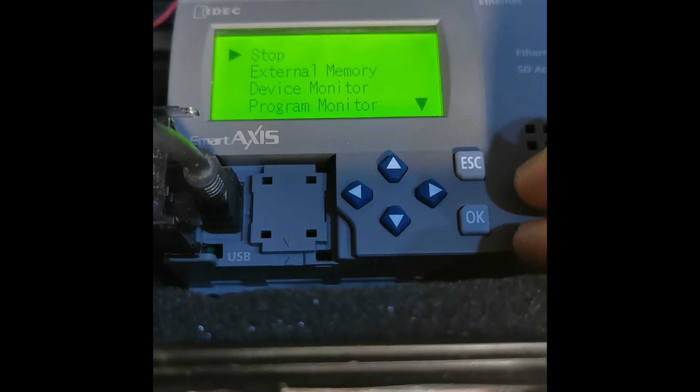It will bring you to a few options to control your PLC. Let us go through them one by one. First of all, by using this LCD display, you can either run or stop the PLC. Or, for those that come with an external memory card slot, you can stop accessing the SD card and so on. So those are some of the basic functions that you can do.

And you can monitor the devices available in the PLC. You can see which input points have been turned on, which output points are being energized, which timer, counter, and also the value in the data registers. You can see the internal control relays as well, which of them have been turned on and so on.

You can also use this LCD display to monitor the ladder program. You can even see whether any of the contacts is turned on and do some basic monitoring.

You can also monitor the status of the PLC. You can see that right now the firmware installed in this PLC is 2.24 and the PLC is in the running stage. The current scanning time is 1 millisecond, maximum 5 milliseconds, minimum 1 millisecond. It also shows whether the program inside this PLC is protected or not; right now it is unprotected. For the FT1A Pro that comes with an Ethernet port, you can also see the IP address of the Ethernet port.

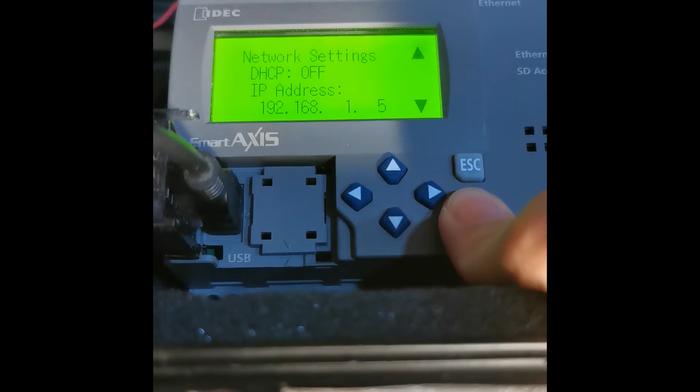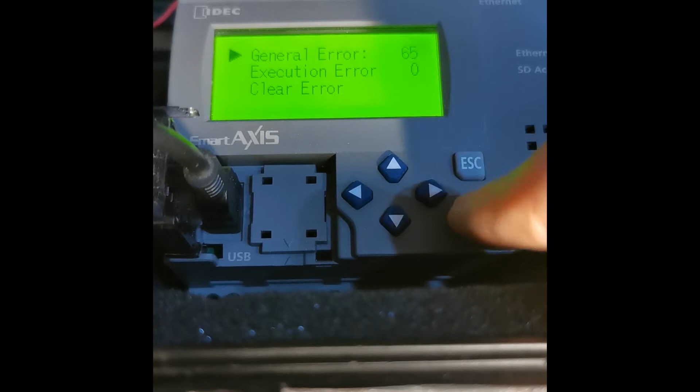Through this LCD, we can also check whether there is any error inside this PLC or smart relay. Other than these standard things, the user can also make use of this LCD display to create an interface that is more interactive or more relevant to the machine being controlled by this PLC or smart relay.

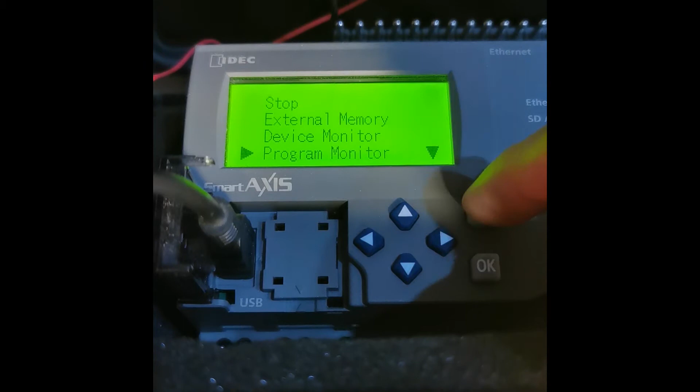Let me show you an example that I have loaded into this smart relay. I have created a few pages for when, for example, this smart relay is being used to control a coffee machine. I have integrated a bar graph here so that when this machine is serving coffee, I can show the progress from 0 to 100%.

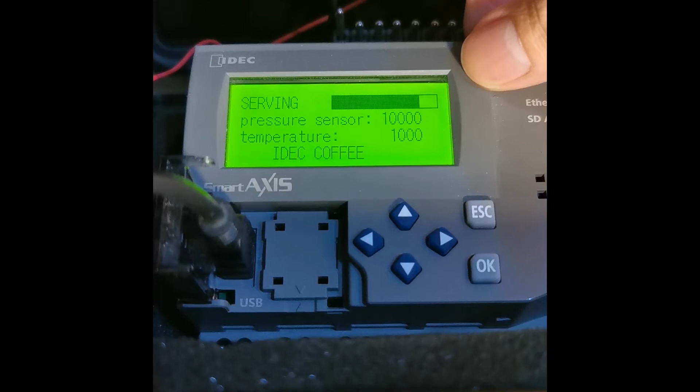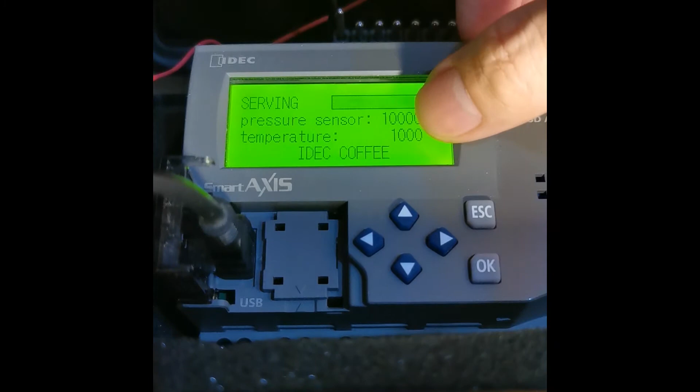Other than that, I can also put in PLC devices here for monitoring. I can see, for example, the pressure signal and the temperature signal from the sensor. I can even integrate these scrolling words.

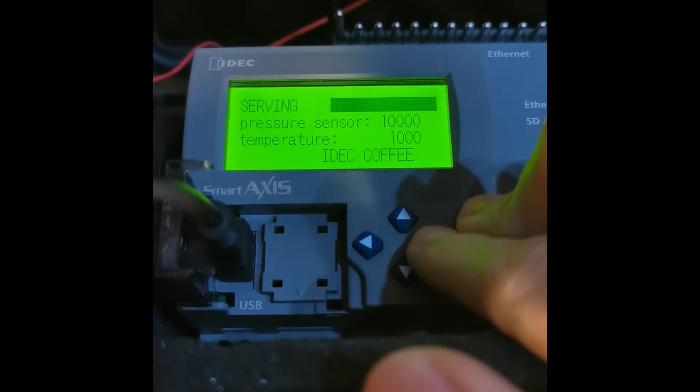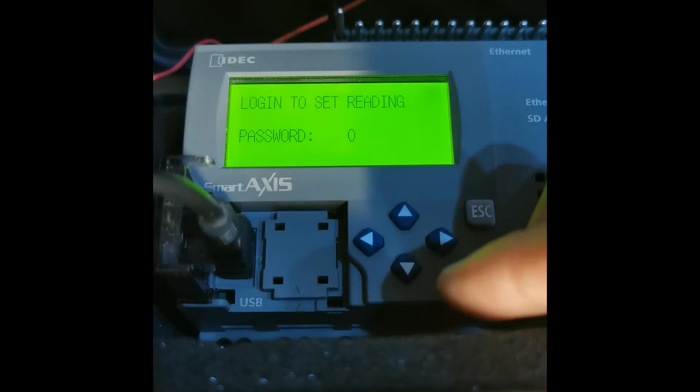And not only one page: I have created a second page to show the active alarms on this coffee machine, as well as a login page in case I have settings that can only be changed by an authorized person. Only those with the correct password can go into the settings page. So how do you key in the password? Again, it's by using these few keys.

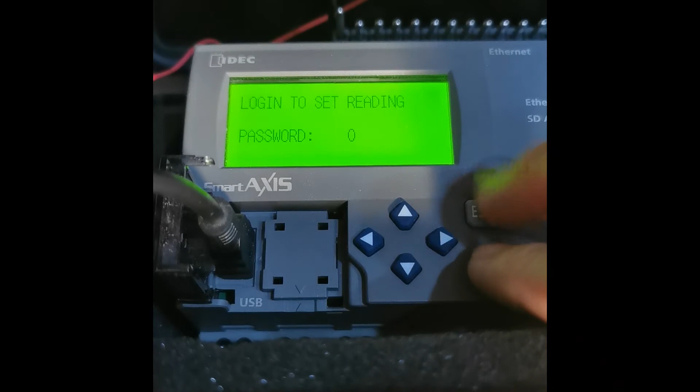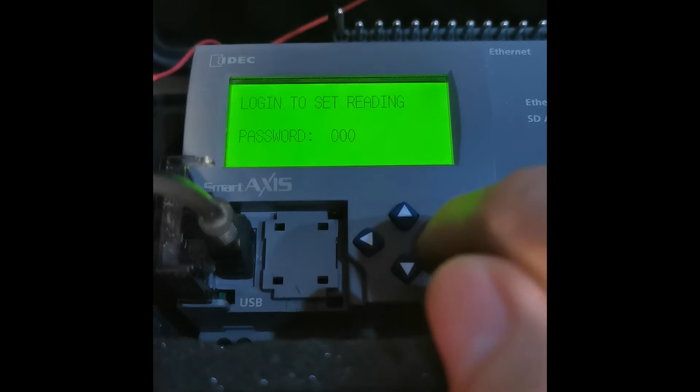So what you need to do is simply press this OK button for a few seconds until it blinks, then press OK again to confirm. In this example, I have set the password as 1234.

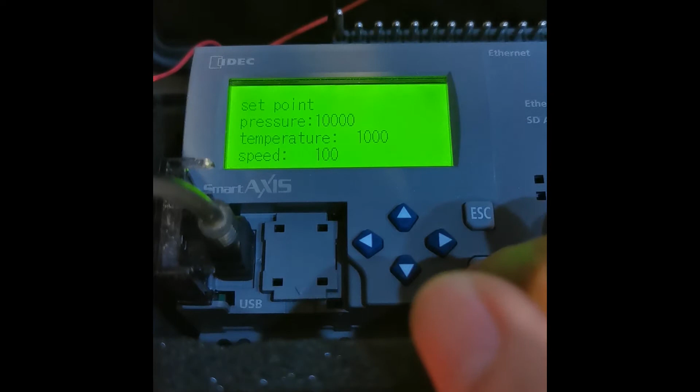When the password is set correctly, then I'm allowed to go into the setting page. In this setting page, if I want to change any of the parameters, I simply need to press OK for a few seconds, and you can navigate to the parameter that you want to change.

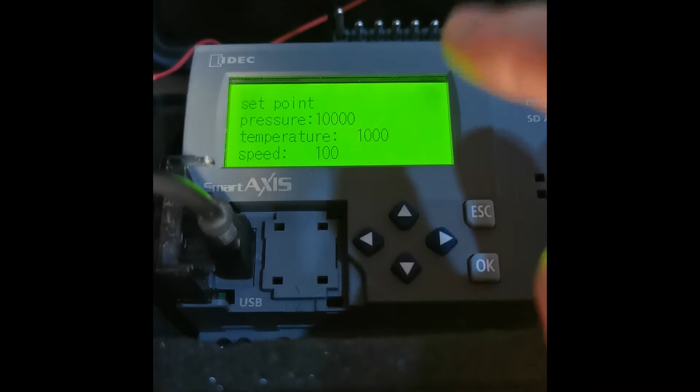Let's say I want to change pressure. Make sure that I have selected the device address that's relevant to pressure. Press OK again, then you can change it accordingly. This is how flexible it is.

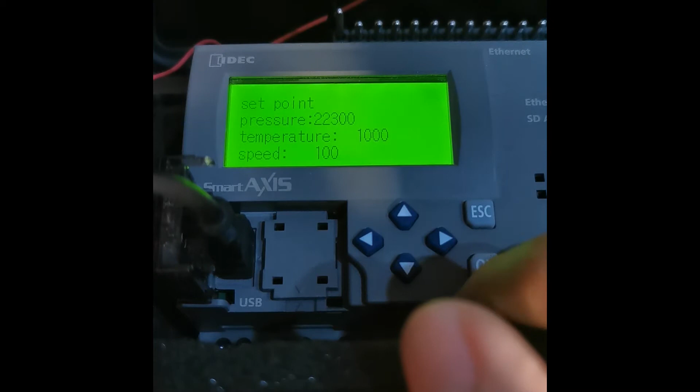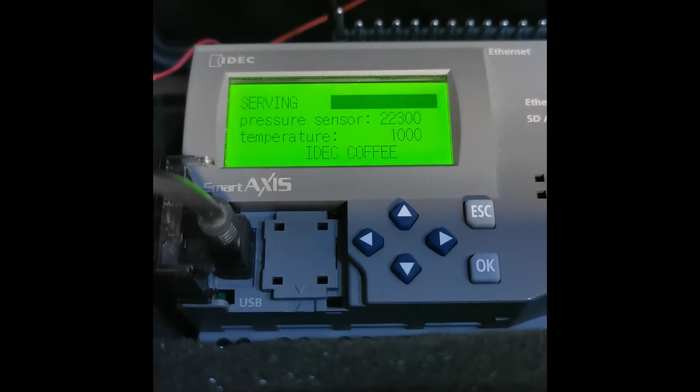So once everything is done, just navigate to a few more other pages. That's all for the introduction. Let us further move into the tutorial on how we can create all these pages.

To create customized pages on the LCD screen, there is no other separate software. We are going to use our standard WinLDR software, which is normally used to program our FT1A smart relay as well as our FC6A PLC.

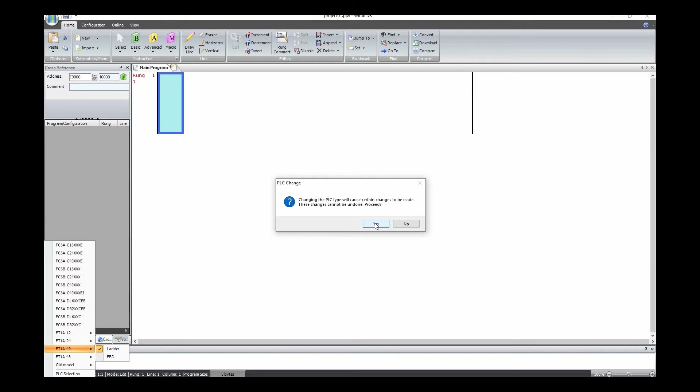The first step to do this is to choose and make sure the hardware is correct in the software. In this example, since the hardware being used is FT1A with 40 I/O, let's choose this hardware and let the software configure itself very quickly.

After that, we can start to write our logic to do the batch control. At the beginning, let us assume to have a data register that is mainly in charge of the batch number. I would like to use D0, data register with address 0, as the batch number.

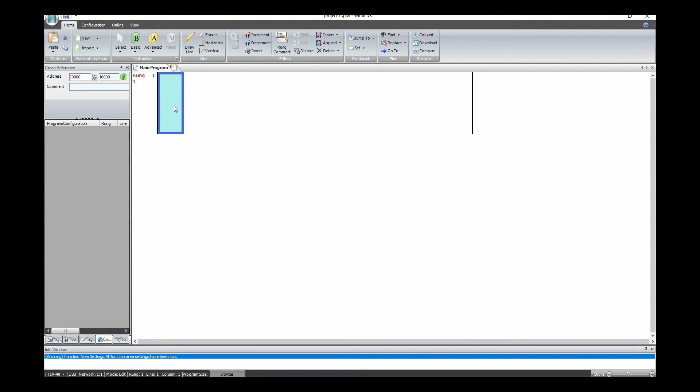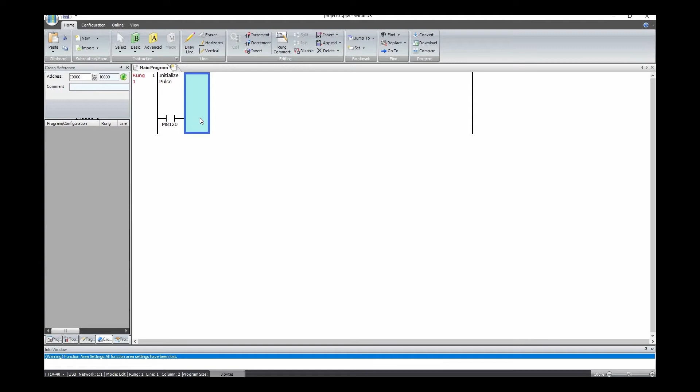I would like to have this initialization for D0. Whenever the PLC restarts, whenever there is any power reset to the PLC, I would like to reset this number to 0 by using this internal special relay M8120. This special internal relay will turn on for one cycle whenever the PLC starts up. So during every power up, I would like to move a value 0 to my D0, which is responsible for the page number.

Other than that, just now you guys have seen I navigate the LCD screen from page to page by using a combination of a few buttons. I recommend using the special internal relay that is already available in the PLC to do the job.

The address is M8160 to 8163. Whenever you press the escape key plus the up key, it's going to turn on M8160, and so on. Whenever you press escape plus right, this is the corresponding special internal relay to be turned on.

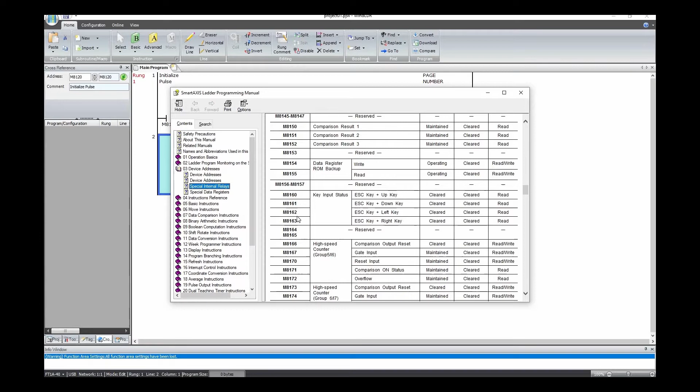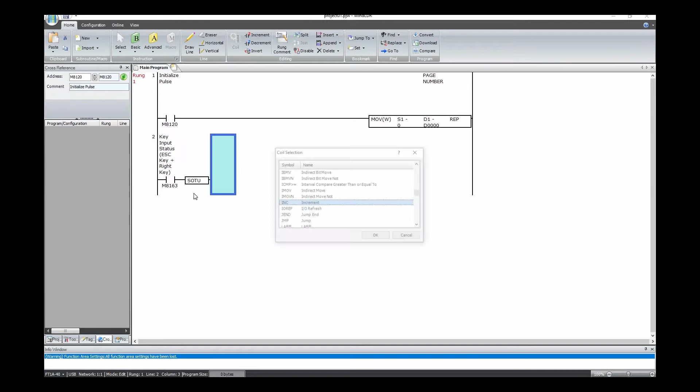Let us insert a coil, using M8163, so that when I press escape plus right key, it will increase the page number by 1. Let us use the single output up to detect the rising edge of this internal relay. When it detects the rising edge, then you increase the page number by 1.

Other than that, I would also like to navigate the page in another direction by using M8162. Whenever I press escape plus left, the page should go back to the previous one. So I should decrease the page number in this case.

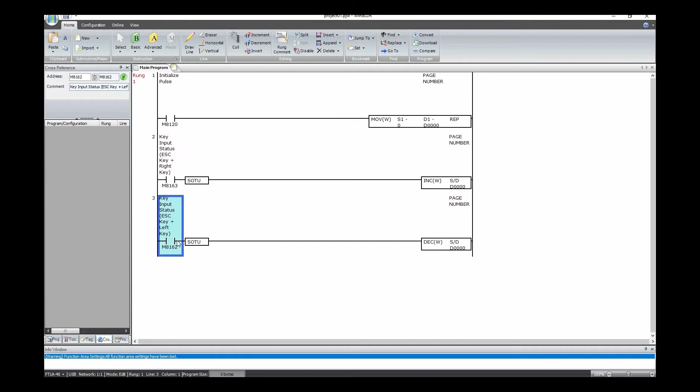Since in our example we are going to create only 3 pages, we should have a condition so that whenever the page number reaches 3, we should reset it back to 0, so that our page will always run from 0 to 1 to 2, and then again back to 0. Let us use data register comparison to do this job.

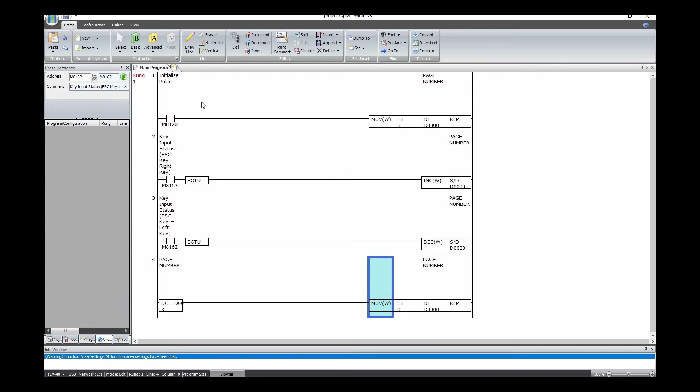Whenever the page number is equivalent to 3, I should move the value 0 into my page number. That's all. This is the logic that is in charge of the page control.

Alright, next let us start to write our logic, our program to show things on the LCD display.

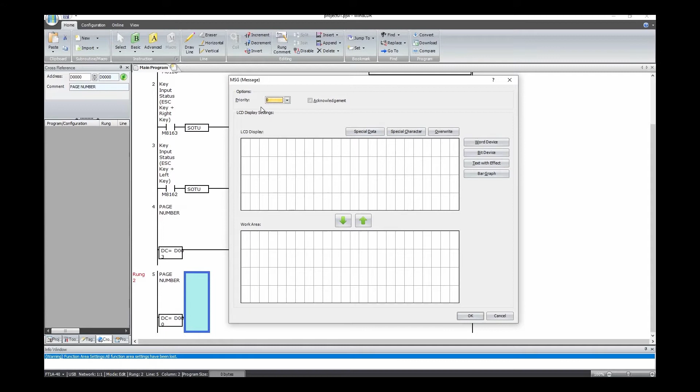So to show things on the LCD display, we can again use this data register comparison. For example, if the page number is equal to 0, what we want to show on the LCD, we can make use of this message instruction. This is the instruction we can use to show different things on the LCD display. Once you select this instruction, you will see this window. In this window, first of all, the thing you need to set is the priority. So why do we need this priority?

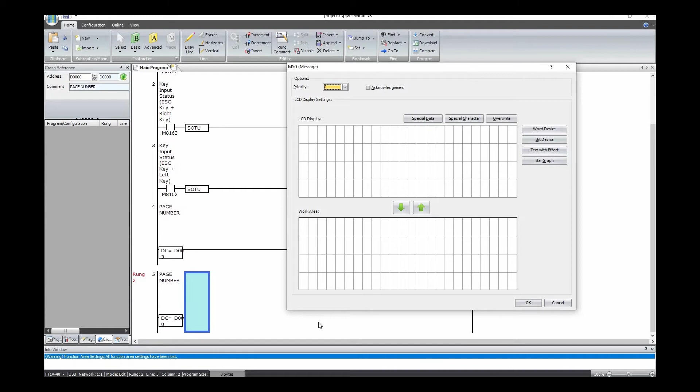Imagine if you have 2 same conditions to trigger 2 different message instructions. How is the PLC or smart relay going to decide what message or what page to show on the LCD when the 2 same conditions turn on? It is actually determined by the priority. You can see we have 0 up to 49 priorities, where 0 is the highest priority while 49 is the lowest. Let us for this case set it as 0.

And for this LCD display setting, we have the LCD display window and we have the work area. The difference is that whatever you have configured under LCD display will be put up onto the LCD, whereas the working area is just a temporary area for you to do your drafting.

If you refer back to the example just now, if you still remember, I had changing words, like ready, ready to serve, or serving, and so on. That is relevant to a bit device. Let me use M0 as the bit device controlling the change of word. When M0 is turned on, I would like to put up the word serving, whereas when M0 is turned off, let it show ready. You can actually put in this kind of special character as well if needed or relevant to your application.

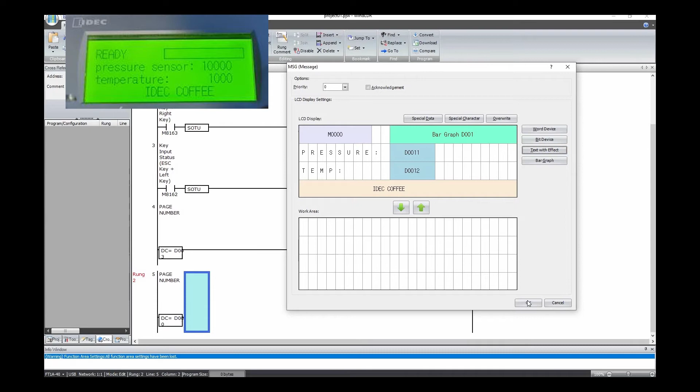We also had some scrolling words, if you still remember. That is relevant to text with effect. Let's say we want to have some scrolling words - what words do we want? IDEC Coffee, or whatever you like. You can input it directly in this location, or if you already have some pre-configured text done in Text Manager, you can always select it from here as well. But for our case, we prefer to key in directly. That's all for our first page - it's pretty easy to do.

All right, next let us move to the second page. Similar conditions - if the page number is equal to 1, we are going to use the same message instruction. For this round, our second page is going to show the alarm.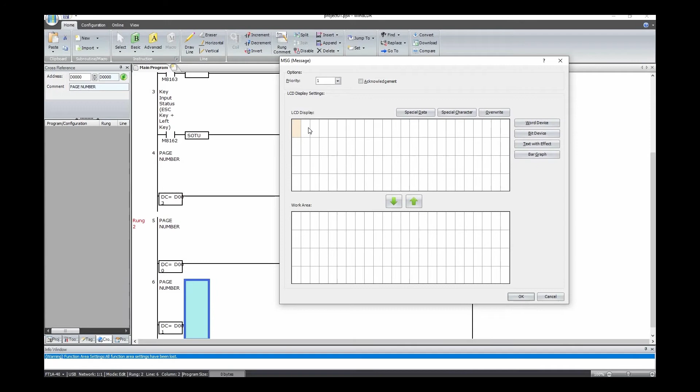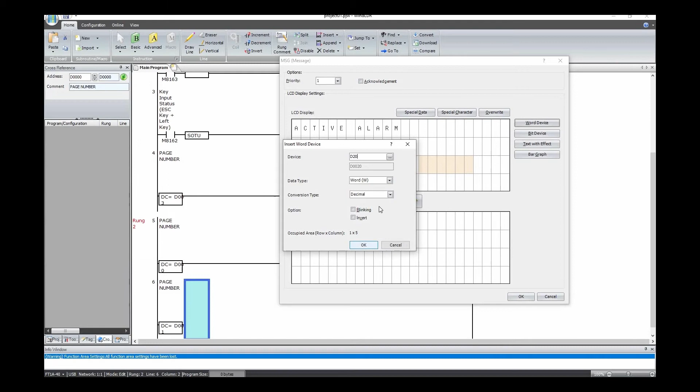Active alarm - we can use this word or whatever word you prefer. Active alarm and alarm number. Using alarm number is an easier way to show the active alarm rather than refreshing words to show exactly which alarm is happening, so showing active alarm with alarm number is much easier to do. Let's say it is linked to D20. If you want to attract attention, you can even highlight this blinking to attract the user's attention when this alarm is being shown on our second page. So that's all for our second page.

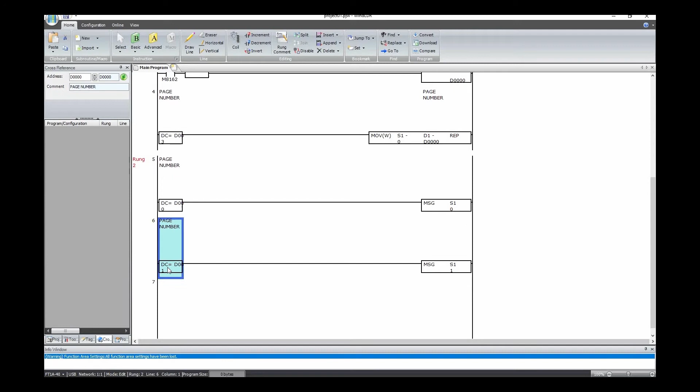So let us move to the third page. Similarly we're going to use this data register comparison. When page number is equal to 2, again we're going to use this message instruction. Let's set priority to 3. LCD display. All right, let us set the login.

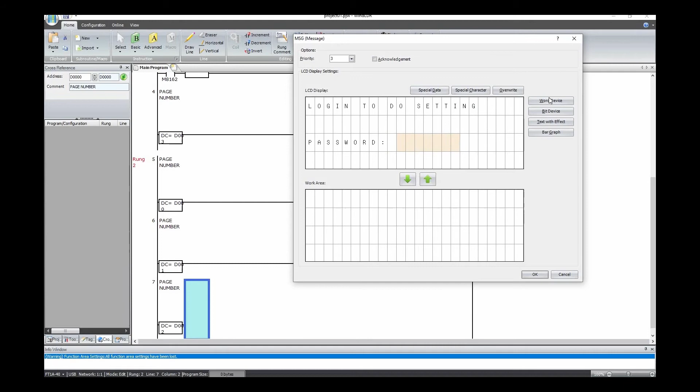You can give some words to let the user understand this is the page for them to do the login - login to do setting, for example. Password - let's say the password is directly linked to D30. D30 is our password.

So you still remember just now we are going to create 3 pages to show in this program. The first one is the progress of the coffee machine, whether it's ready to serve or is serving, and is showing pressure or temperature of the machine. The second page is to show the alarm, and the third page is the login page. So when login is successful, it is actually going to show something different on the third page.

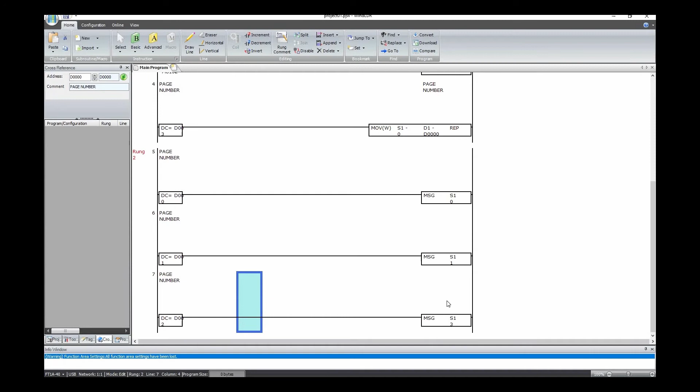So in this case, let us create some conditions to show the third page. Let us give a condition, for example, linked to M1, and this is what we call password not correct. So when password is not correct, I'm going to show this login page for the user to log in. All right, so when the password is correct...

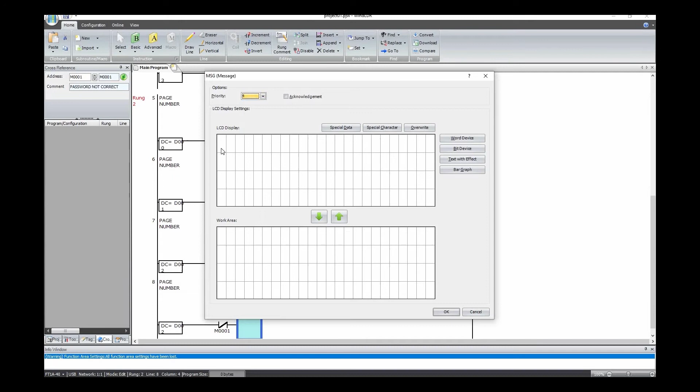So when the password is correct, then I'm going to show something different - I'm going to show the parameter setting page.

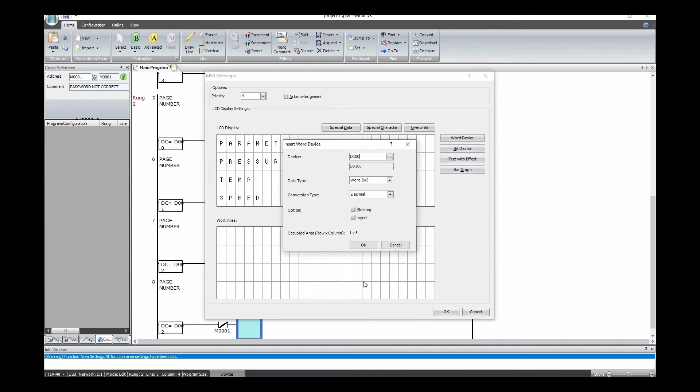This allows the user to do some setting for pressure, let's say, or temperature, or even speed if you want. So let's say the pressure setting can be done at D100, for example, and temperature setting can be done at D101, and the speed setting - let's say the coffee bean grinder speed, for example - can be done at D102.

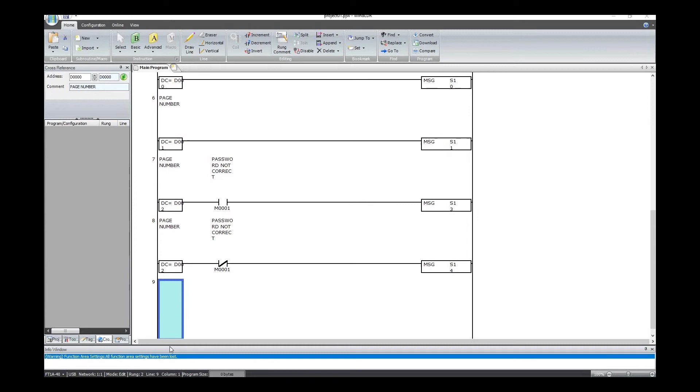Okay, so this is the login page. Right, so what determines this M1, whether it shall be turned on or not? So actually we should have another condition. Let us use this always true - we should use a comparison instruction, let's say.

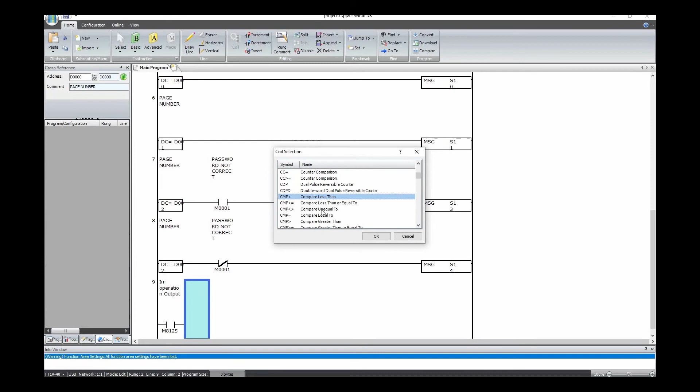We should use a comparison instruction - if let's say D30, which is our password, is not equal to 1234, we shall turn on this M1. Password not correct.

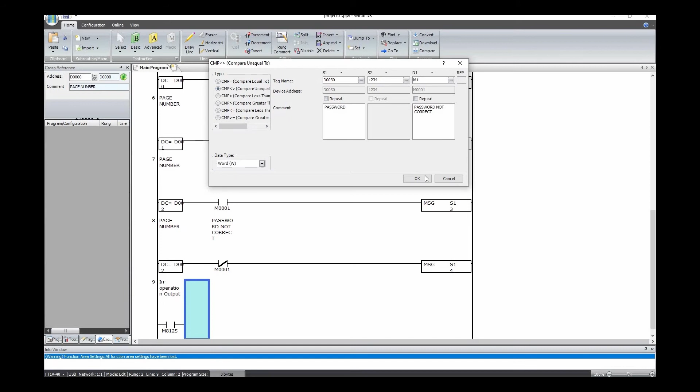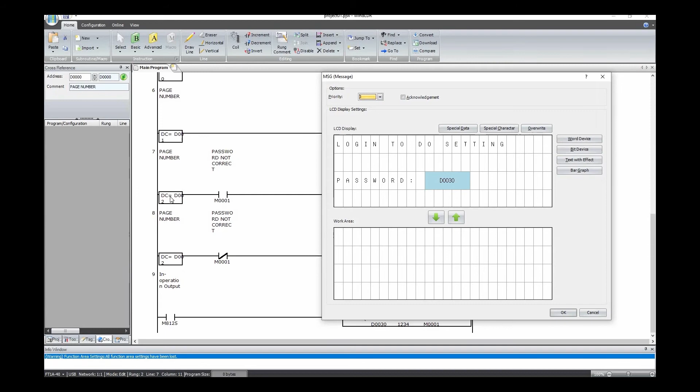So let's double check again - whenever the password is not equal to 1234, this M1 shall always turn on, to prompt this page for the user to put in their password when the page number is equal to 2. And if the password is already correct, we shall show this page for the user to do the setting.

Okay, right, but be careful - if you are the machine maker, you do not want, let's say, operator A, after he keys in his password and after he leaves the machine, for operator B, when he comes to this machine, to still be able to change the parameter.

So what we can do, we can actually write an additional condition so that whenever there is any power reset on this coffee machine, you should wipe out the password keyed in by operator A, for example. So how can we do that? Again, using this initialize pulse.

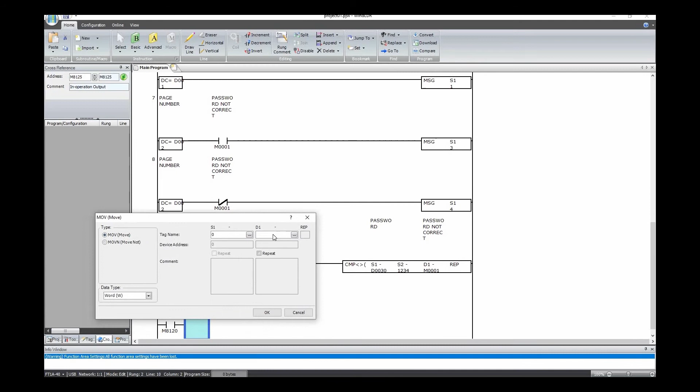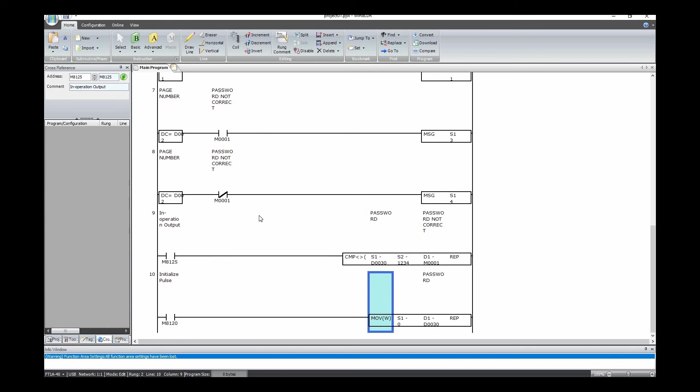When the PLC is power reset, we move a value 0 to our password D30. So that means you can tell all the users or operators of this coffee machine, whoever has just done the setting, please do a power reset to the coffee machine so that nobody else can go into the setting page to do the setting. Right. So that's all for the LCD display programming side.

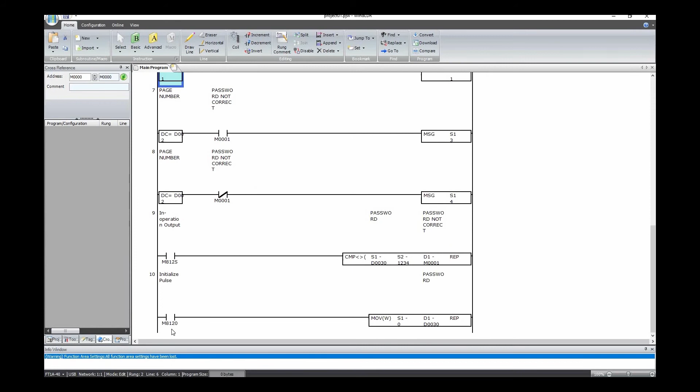Forgot to mention just now, in our page 0 we have used a bar graph to show the coffee serving percentage from 0 to 100. So we should have a very simple program to control the bar graph, increasing from 0% to 100% while the coffee is being served, which is controlled by control relay M0, if you still remember. So we can actually write a very simple program.

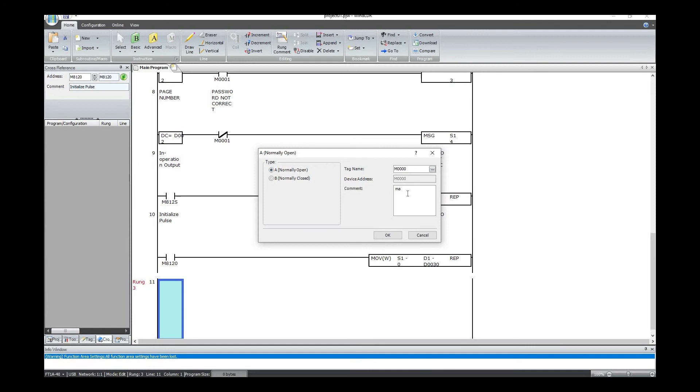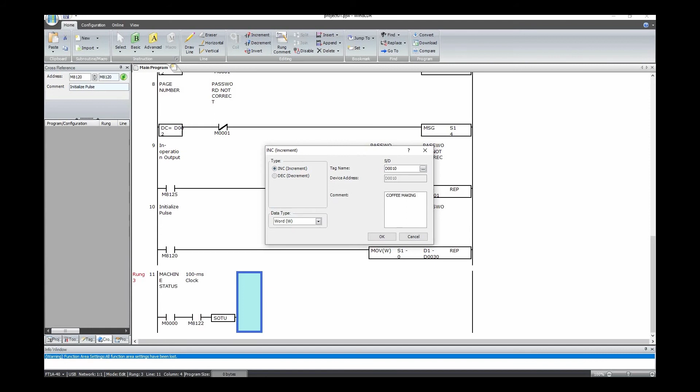So when M0, which is the machine status, let's say we can call it machine status. So when the machine is serving coffee, we can use an internal clock pulse of 100 millisecond to increase the percentage, D10. So this is the percentage. All right. So to slowly increase this from 0 to 100.

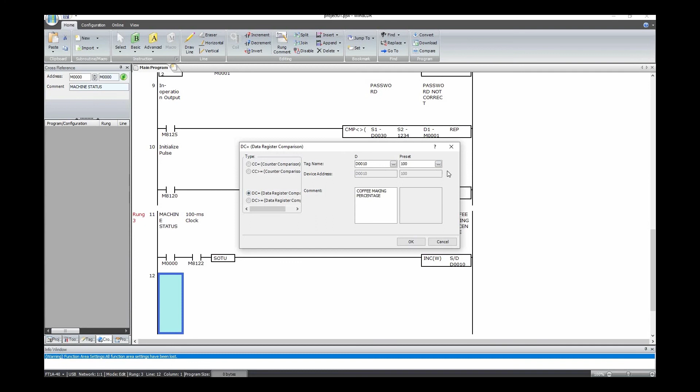But this line of program will not limit it to 100% only. So that's why we will need an additional line to limit it at 100%. We can use again data register comparison D10. If it is larger or equal than 100, you can trigger an output to, let's say, M5. We can call this 100%.

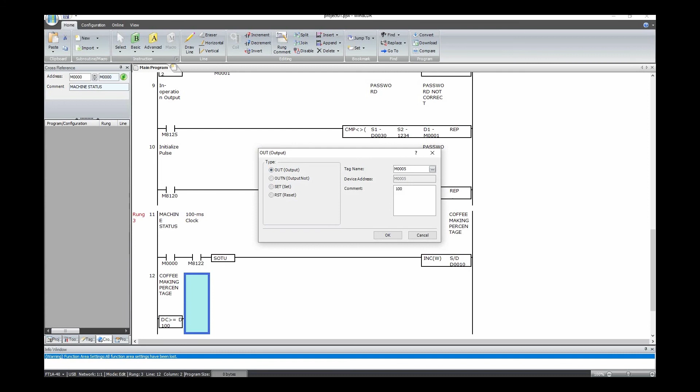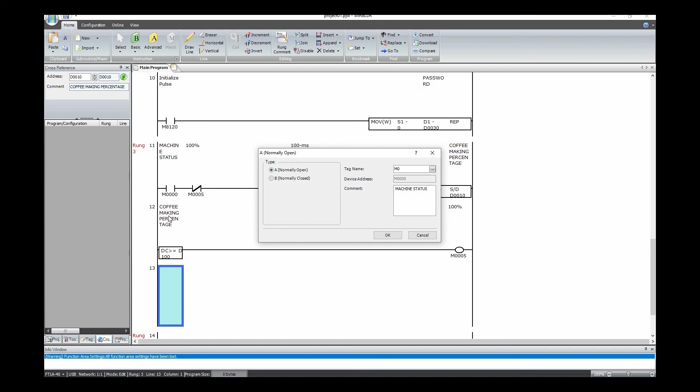So we can have an additional condition over here. If the percentage is not 100%, then it should keep increasing as long as M0 is turned on. Right, and then this M0. So when this M0 is turned off, we shall change the percentage to 0. If M0 is turned off, we shall move 0 value to the coffee making percentage. All right.

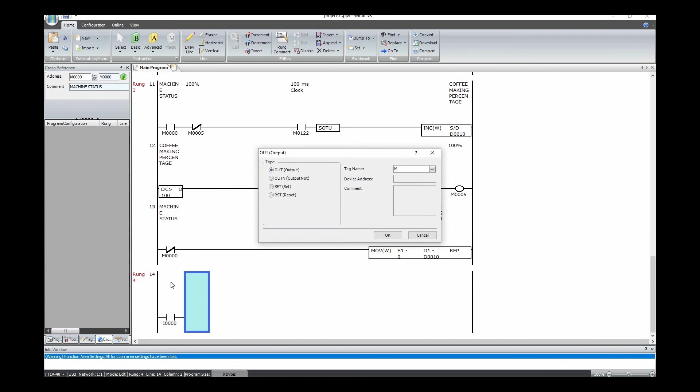So in our hardware, because we can't directly control M0, we can use I0, input number 0, to control the M0. Right. That's all our program. We can have a try. Let's download it to our PLC and take a look how it works.

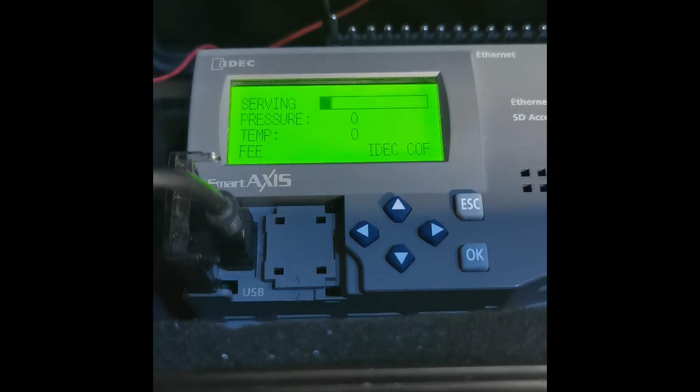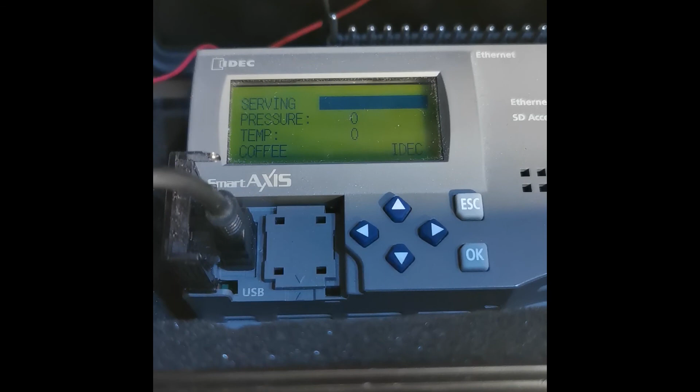All right, we have already downloaded our program into the smart relay. Let's see this in action now. When we turn on the I0, it's going to turn on M0 instead, and it's going to change the wording from ready to serving. And you can see when you reach 80%, this bar graph is going to blink. IDEC coffee is scrolling, right?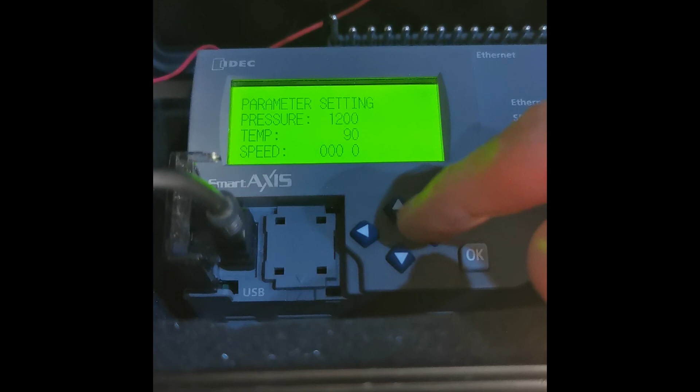Again, if you want to change the pressure setting, you can always do that. For example, if you want to change the temperature setting as well, in case you don't want the water fixed at 100 degrees Celsius, you can always change it. Let's say 90 is enough. You can even change the coffee bean grinding speed, just for example. I'm not too familiar with coffee machines. 10 RPM. All right, so that's all.

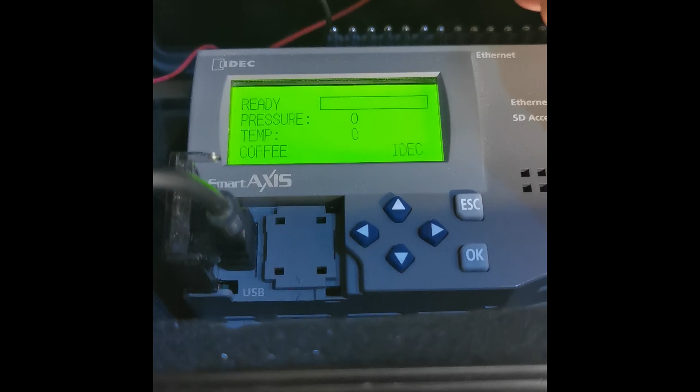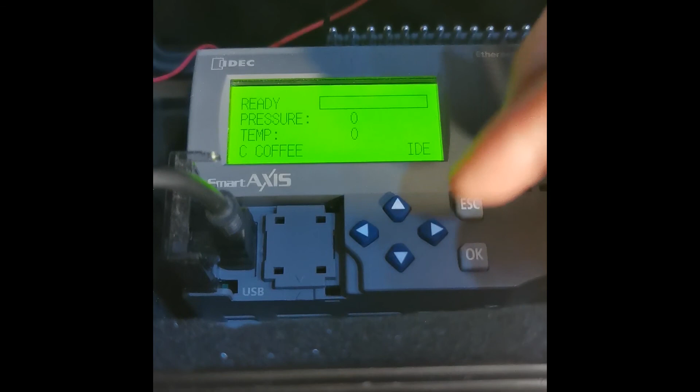So in case operator A has changed the parameter, you should do a power reset so that the next person who comes to this machine is not able to log in unless he has the correct password.